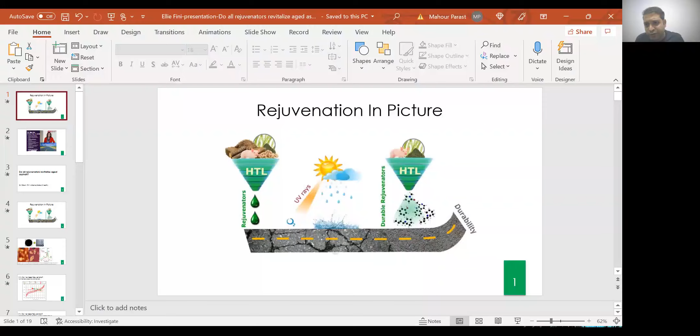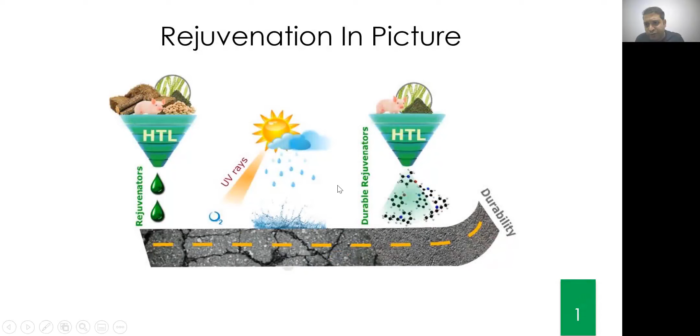We're going to talk about something quite interesting to me and my group: aging and rejuvenation. Before I start, I want you to think about what aging involves. In science, we measure and quantify aging, but in everyday vocabulary, aging is a well-known concept—by every birthday, you yourself are getting aged. Aging is an indication of time passed from the creation of a material, the same as in a human being. As you age, your skin gets aged under the sun, and your bones get aged. Those are all mechanisms of degradation.

When you look at the surface of asphalt, one of the built environments we create as humans, over time it gets aged, and you can tell if it's a brand new asphalt or an aged one. It doesn't really take much science to look at asphalt and figure out if it's a new piece of road or if it's been there for quite some time—there are signs. So I want everyone to think about that and maybe put in the chat box what you think aging of a material involves. What is that? Something is aged or is not aged?

So you look at this material I put here, and it seems something is spraying on the road, and we call those rejuvenators. You may hear a lot of different rejuvenators these days in the market trying to restore and revitalize aged asphalt, so they allow or enable the recycling. The topic of this discussion is for you to think about whether any modifier out there is a good rejuvenator, or if it can even rejuvenate an aged asphalt.

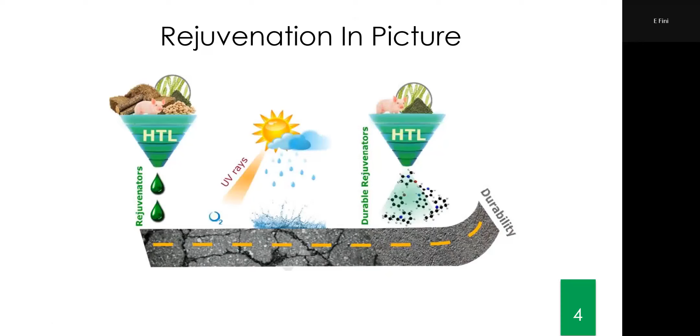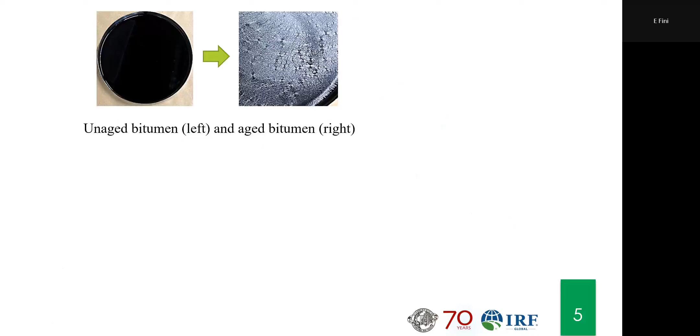Let's see what happens aside from look. I told you there are many different tools, so I wanted to show you a bunch. Right now, on the top picture, it doesn't need much of a scientific tool—my eye and your eyes are actually a good tool to say the picture on the right and the one on the left are different. One is aged, one is not. Now let's look at more sophisticated tools.

One element of aging is actually changes in chemistry. What happens with the progress of time and oxidation? Oxygen is in the air, so it combines with molecules in asphalt and forms oxygen-bonding compounds like carbonyl. Here you can see the carbonyl measured by Fourier transform infrared spectroscopy, FTIR, which most of you are familiar with. We calculated the increase of carbonyl over the aging time.

If the material would not age at all, the carbonyl index would not go up, because there's no more oxygenated compound forming. This carbonyl is basically a CO compound—oxygen bonded with carbon. So these carbonyl groups go up as the aging progresses. Initially you see a big jump, then the rate slows down, but it still keeps going up. We only went up to 200 hours, which was still pretty severe, and we stopped right there. You can see how it goes up.

Then we looked at mechanical indicators. As I mentioned, one indicator is just my eye looking at it. Another is the chemical indicator based on FTIR, and the mechanical indicator based on crossover modulus. At the beginning, the crossover modulus of the unaged sample is up there, at 20 megapascal. As it ages, the crossover modulus starts dropping—initially much more, and then it slows down, but it still keeps going down.

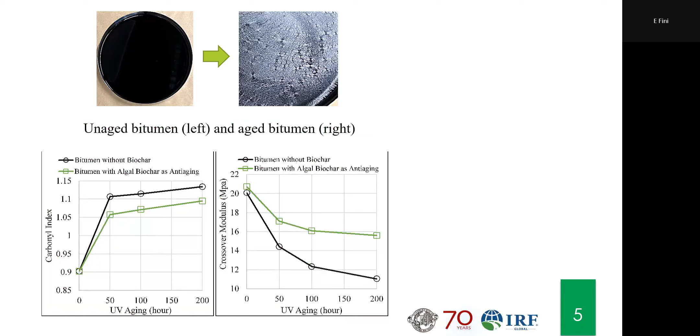So one more level of measurement is, if I see aging, how much aging happened, I can say with this. So I can measure how much aging. With this, I can say where it happened. Is it just on the surface, or is also in the bulk? Are they equally aged or not?

So I caution you, if you look at aging and get into the study of aging, be careful on the depth variation, because as I showed you here and we published in this paper in ACS, the depth, the downward inside the bulk is a different story than on the surface. Clearly shown here with the two spectra, one on the top, one in the bulk, and they are very different.

So in case you age the sample and then started doing, for instance, DSR test or bending test, tensile test, what are you really testing? Are you testing the top layer or the bottom layer?

Maybe the very, very bottom layer, if you have a thick sample of 1 millimeter or more, is not even aged. So what you're really measuring at that point, when you mix the whole aged sample and start doing tensile or bending tests, maybe you're just measuring an average of aging. The top layer is pretty aged, the bottom layer may not even be aged. So now you're mixing the whole sample, you're gonna get an average, which is literally lower than the real aging level on the top.

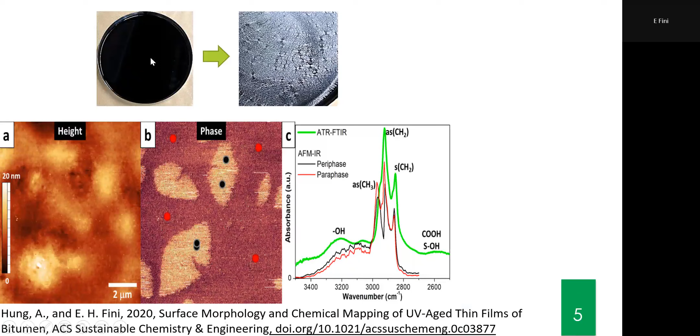It's expected because you get the material more brittle, more stiff as you age it. Just looking at this picture, you get that same feeling, isn't it? So this becomes more stiff than this. So if I'm gonna shear it, this will shear easier than this, and that's what this test said. So the aging makes it go to a higher modulus.

So if my rejuvenator is going to work, what it's supposed to do is reverse it. Let's see what it does.

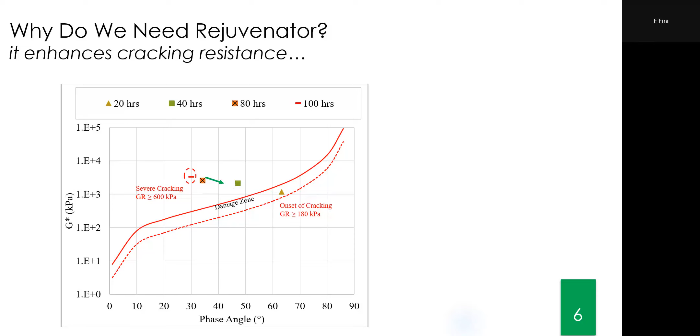So when we want to improve it, we want to make sure it doesn't crack. Because literally, if the sample is up here and it cracks, and your rejuvenator doesn't move it downward, then you haven't really improved the crack resistance. You may reduce the modulus a bit, but if it's still too high, it could still crack.

So these are the ones with the rejuvenator added, and each one of these points jumps back. The triangle jumps back below the dash line, the rectangle jumps back here, the cross, and so forth. But you can see here, the one with 100 hours didn't even move.

So the 100-hour aged material at that point was too aged to have any meaningful restoration. The other three did change, so there is some hope for them to get improved. But the one after 100 hours did not even move. So that's one indicator of restoration.

Obviously, if you have another measure—let's say G star, stiffness, strength, crack resistance, or any other indicator you measure—if you know the results before aging or at a lower level of aging, you want your rejuvenator to give you back the good stuff you had. So conceptually, the meaning of rejuvenator is revitalizing the properties that are lost, revitalizing the characteristics that you no longer have.

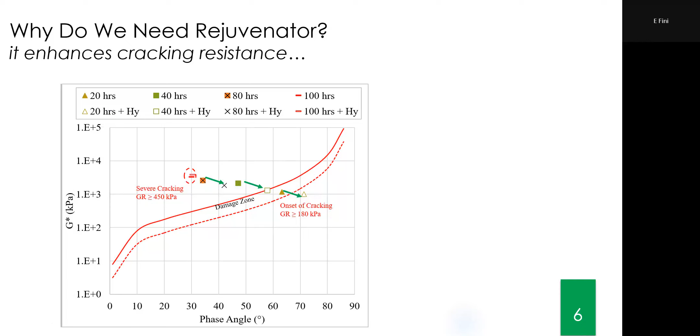Another characteristic I'll show you, which might not be as common in the spec, but if you think about asphalt as something that can heal, then you expect that as it ages, if the healing is lower, you want your rejuvenator to give you the healing capacity back.

So the concept of healing is actually a biomimicry way of thinking about material recovering. If you think about your skin, if you get a scratch or a cut, after a while the cut is gone. These materials are not alive like us—can asphalt heal itself?

Well, there is some healing capacity in asphalt, and it's been shown by different tests. When we create a tiny enough crack and let it sit, it can heal. So we measure that—there are ways to measure the healing capacity.

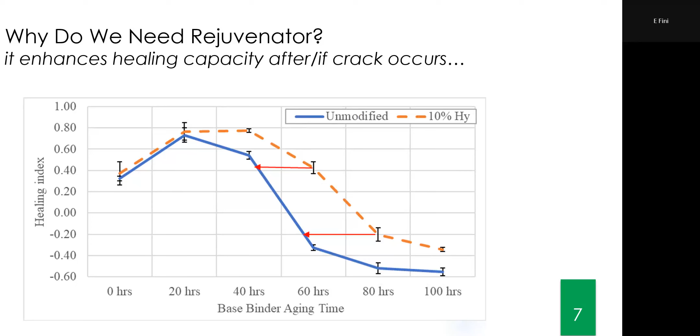So some of the rejuvenators, some of you may be familiar with rejuvenators or what they are made of. A group of rejuvenators that are now in the market, there are some that are in the research phase. My group has been working on a bunch of them. They're made from biomaterial and biomass. There are another group of rejuvenators that are paraffinic wax, and there's an aromatic group that are petroleum-based as well.

Regardless of what their source is, we're talking about molecules. So if you're getting that specific aromatic structure from petroleum, from pine wood, or from animal waste, that's a molecule. Sometimes you hear the categorization as bio versus non-bio. Well, that's fine, and it's nice to have something biodegradable because of all the carbon sequestration and reduction of fossil fuel dependence. Those are great things, and I'm very much an advocate of sustainability. My group has been one of the active ones in production of bio-based material and bio-based rejuvenators.

But what I'm trying to tell you is molecules are molecules. They don't care where the source is. I'll show you a bit of the molecular modeling side to say, if I have an aromatic structure, or a fused aromatic structure that does this type of activity within the aged asphalt, regardless of where the source is, as long as it has the same number of carbons, the same ring structure, that will do that action. If it's from bio, that's one advantage, which is renewable, it's bio-based. Some of them are from waste, which is another advantage. But we have to separate sustainability and bio-renewable aspects from the molecular efficacy of the action of rejuvenation.

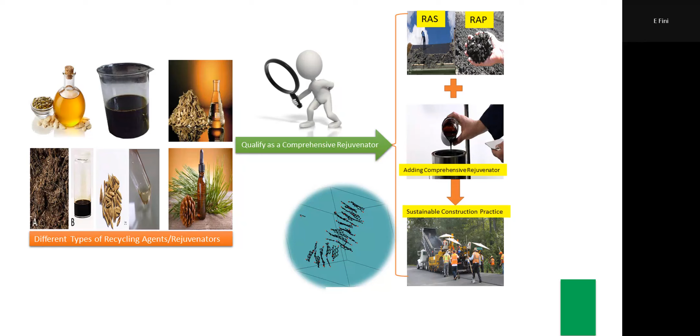So if you pick a rejuvenator that does work and improves your crack resistance and healing capacity, does it compromise your moisture damage? Now suddenly you get an asphalt pavement that used to have no moisture damage, and because you added rejuvenator, now it becomes susceptible to moisture damage. That's something you have to keep in mind as you add new materials.

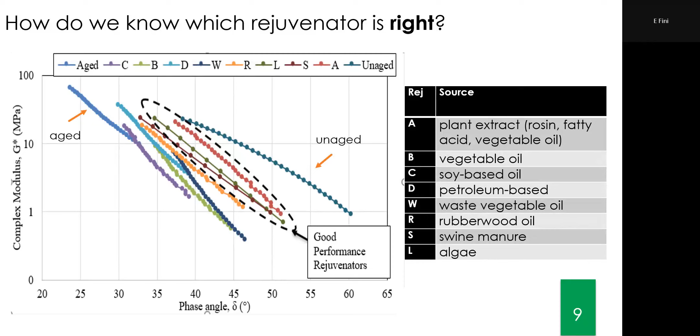So I wanted to show you what made all of these guys different. Like the one I showed you, you may say, well, they're soy-based. Yes, that's soy-based. They are different sources, but asphalt doesn't care about the name. Name is something we give to material. Asphalt cares about the molecule it sees when we inject it or dope it with. So the molecule it sees is the one that attacks or gets to the aged asphalt.

We're going to have aggregated asphaltene here. So aggregated asphaltenes need to be broken apart to get back to the conformation of the unaged status. In the unaged status, we don't have such large agglomerates because they're not polar enough to attract each other. In this case, the rejuvenator's role is to get into those stacks and break them into smaller ones.

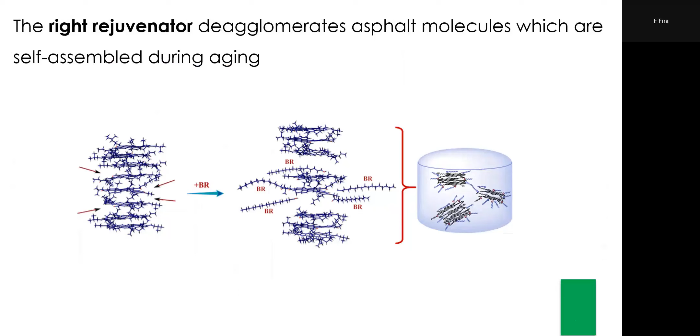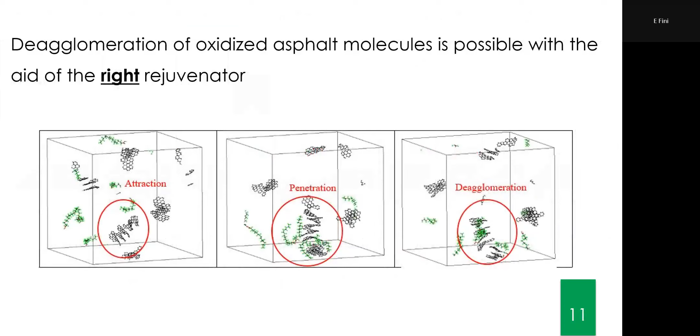How can I measure it on a bigger scale? What I'm showing you here is, of course, molecular dynamic simulation at the molecular level. How can I measure this phenomenon at a macro level? Obviously, I can't do it by naked eye, looking at it to see if it's deagglomerated or not. So we did a lot of tests to find an actual macro-level test that can connect what is happening at the molecular level. Here you can see the crossover values.

For those of you not familiar with the crossover parameter: when you measure modulus and frequency, because asphalt is viscoelastic, it has viscous and elastic components. That's why we always plot any modulus property, elastic modulus or complex modulus, against phase angle or against frequency, because asphalt is frequency dependent. You can measure the property of asphalt to be X at one frequency and Y at another frequency. It's not like an elastic material—you always have to look at the frequency at the same time.

So when you look at the elastic modulus and viscous modulus, there is a point, a frequency point, where the two of them are equal. That's called the crossover modulus. And the frequency at which the two values are equal—elastic modulus and viscous modulus—we call that the crossover frequency.

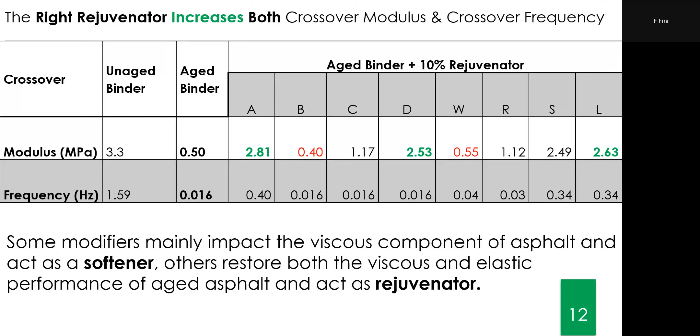Then one other thing is when you look at the different scenario for aged rejuvenated asphalt, the modulus and frequency here, we studied them with actual RAP. So we got 25% RAP and 75% virgin material, and in one scenario we had 100% RAP. In all those scenarios, you can see the change as the rejuvenation was taking place.

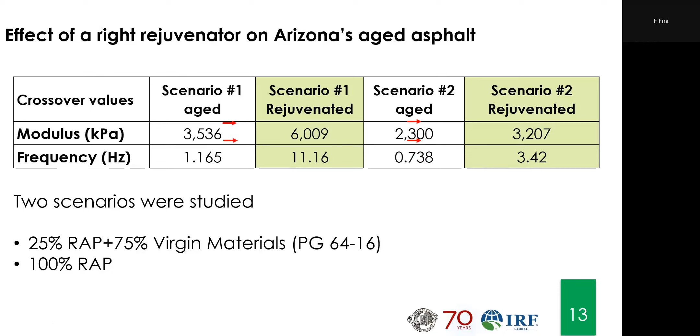This is actual RAP from the road. The effect of rejuvenator in Arizona-aged asphalt was very noticeable. Arizona's aged asphalt is highly aged because we have many days of sun and high temperatures above 100 Fahrenheit, so in this case we actually get very aged asphalt.

You can see here how the rejuvenators work for crack propagation. On the green side, you can see the slope, and then you can see the control plus rejuvenator — they are different in terms of their category. So you can see it reduced the crack propagation.

It also improved the energy required to propagate the crack. That's basically a test we use for crack propagation as a function of crack length.

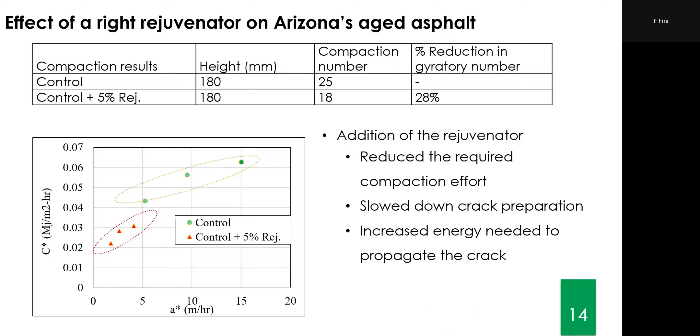One other test I want you to pay attention to, if you end up working with different rejuvenators, is always about moisture. Because many of the rejuvenators, especially those that are bio-based, may have molecules that are moisture susceptible. In this case, we had two scenarios, and as I mentioned in the previous slide, A, D, and L were the ones that changed both crossover modulus and crossover frequency.

So now we are just looking at these three. When we actually did the Hamburg test, only L could go to 20,000 cycles for the stripping inflection point; the rest were lower. Funny enough, the extracted binder, which is the aged binder itself, was 20,000 plus — so the aged asphalt, extracted binder, did not have any problem.

When we rejuvenated it with A, now we get 13,000, meaning it's more moisture susceptible than the aged asphalt was. When we added D, the same thing happened. Only L did not reduce the number of cycles at the inflection point.

The inflection point here is used as a sign of stripping. You can see with the schematic, when the inflection point happens, you get two slopes — a creep slope and then a stripping slope. The cut here tells you how many cycles it takes to reach this inflection. In this case, aged asphalt had 20,000 cycles before it reached the inflection point.

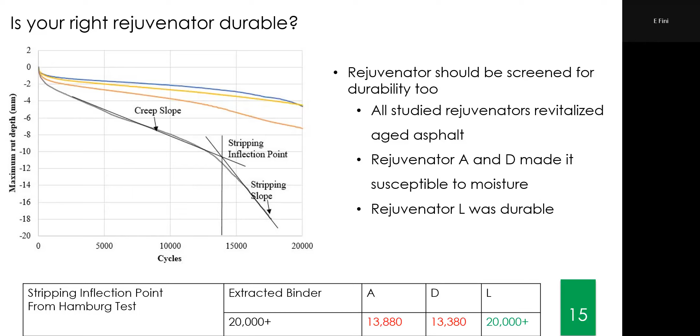And so far, from all the lists that we started with, only L passed the moisture resistance test.

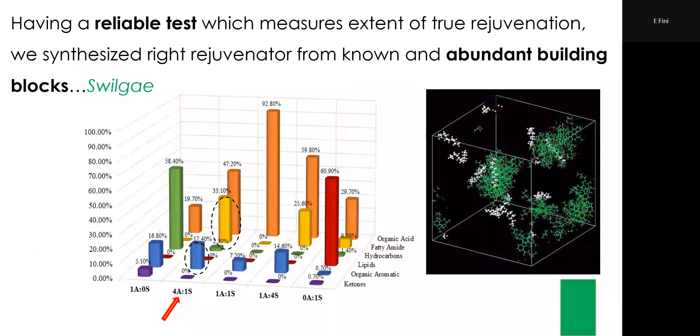So of course, for rejuvenation and true rejuvenation, we need a reliable test. And in this case, to connect the molecular phenomena, whether you measure it or simulate it, it doesn't matter. There is something happening at the molecular level. It doesn't matter if you see it or you can measure it or not, it is happening. So if we have a test that reliably connects molecular level to macro level, then we can truly measure rejuvenation.

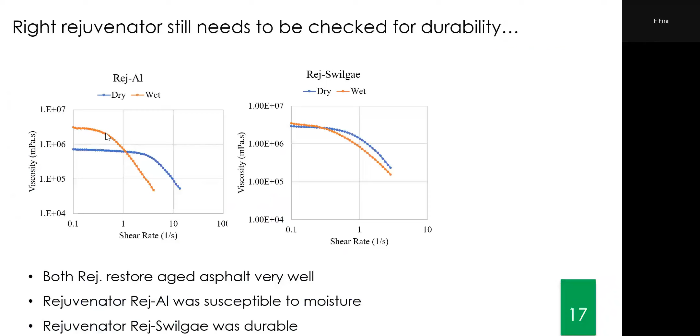To measure the complex viscosity, you can always use DSR, and depending on the stiffness of your sample, you can use different temperatures. The reason we use parallel plate - most of you are familiar with 25 millimeter or 8 millimeter - these just allow us to perform the test, because each machine has a limited torque capacity. If the material is too stiff, you can't even use the machine. So based on how stiff your sample is, you have to adjust the spindle size and temperature to fall within the torque limit of the machine. I'll give you an example: if you're testing honey, and in the morning you try the honey after taking it from the fridge, you can see it's harder to pick up a spoon of honey.

Leave it outside sometime, it's easier to take a spoon out of honey. That's called shearing, so if you feel it's stiffer, that means the machine feels stiffer, and each machine has a limit. To answer your question, you can measure it at 60 degrees depending on the machine you have. And if you feel it's difficult or it goes above the torque limit, you can use a smaller spindle. We even have cone and plate instead of parallel plate, which allows smaller samples.